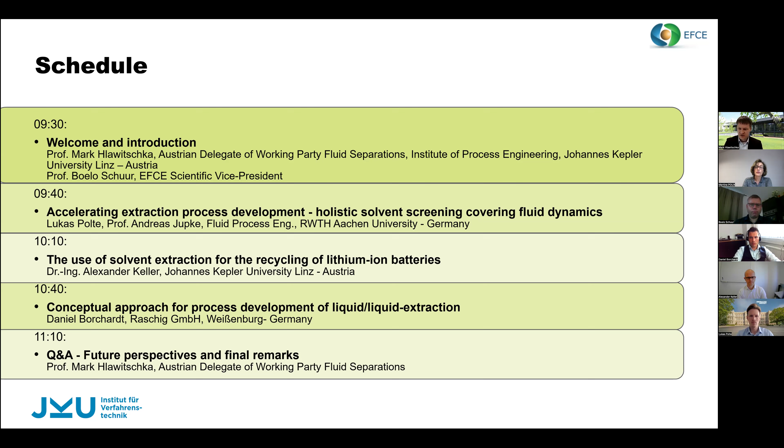About solvent extraction, from my point of view, it's becoming more and more important again because it's one of the drivers towards climate change, but also due to the global political shifts that we see. Liquid extraction or solvent extraction is one of the core technologies for efficient purification, resource recovery, and recycling. One of the main issues we face here in Europe is critical materials recovery, where we see lithium, cobalt, and nickel from spent batteries, for example. But even with green energy, we need rare earth elements for wind turbines and electric vehicles, and we see a broad application of solvent extraction towards pharmaceutical, hydrometallurgy, petrochemical refining, and wastewater treatment as well.

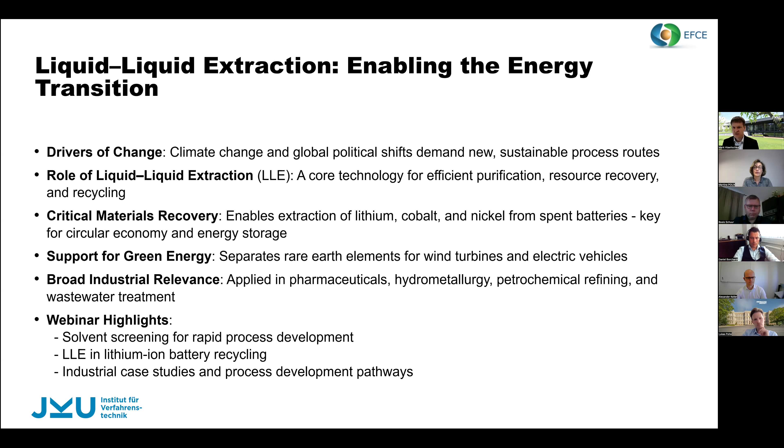So let's start with the webinar with the first talk about solvent screening for rapid process development from RWTH Aachen by Lukas Polte.

I just need to close mine. Oh, sorry. Now you should be able to open yours. Now it should work and you should see my screen, right? Yes, perfect, so the stage is yours.

Thank you very much, Mark, for the kind introduction and the words. I'm very happy to be here and to give some insights on our experiences on process design and process development for extraction processes. I fully agree on the points you said and just want to underline them.

In the process developments we did in research projects over recent years for so-called next generation or sustainable processes, we usually face a unique challenge. If you think about fermentation broths, metal recycling, enzymatic conversion, but also other recycling technologies like hydrolysis, you often end up with an aqueous phase where our target products are very highly diluted. If you want to use the classical petrochemical version of downstream processes, so rectification, this is not very sensible for those kinds of product mixtures.

In the research projects we worked on, extraction, liquid extraction, is often a very energy efficient alternative to tackle those challenges. Solvent screening is an essential part of process development for extraction processes because the solvent screening and selection happens in a very early phase of process development, but determines the process performance at the very end of the process development.

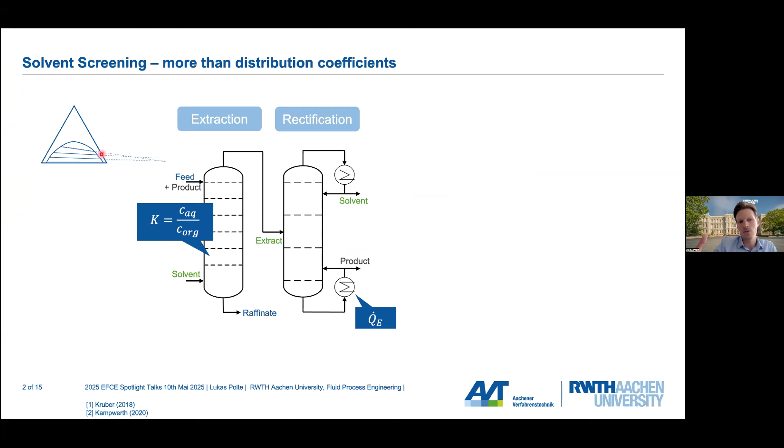If you look at the literature, there is a bunch of different approaches for this solvent selection. The easiest one simply relies on distribution coefficients or heat of evaporation for the rectification part, so simple performance indicators. You can go for more sophisticated models like pinch-based models, which depict the thermodynamic limitations very well and give a broad picture of the thermodynamic feasibilities of separations. But those approaches have one thing in common: they're sequential.

In the phase of solvent selection, you do just this thermodynamic picture of it, and the equipment design happens in a much later phase of process development. Even if you go for flow sheet simulations using equilibrium stage models in the solvent selection phase, you will use constant HETS values, height equivalent to a theoretical stage, which is perfectly fine for rectification, but not good for the extraction part.

Because we know in extraction, fluid dynamic and dynamic effects overall matter. We see, and we know from literature, that the HETS value may vary by a factor of 5, 6, or even higher. Which means if you use a constant HETS value at this stage of process development, you will end up with inaccurately estimated column dimensions.

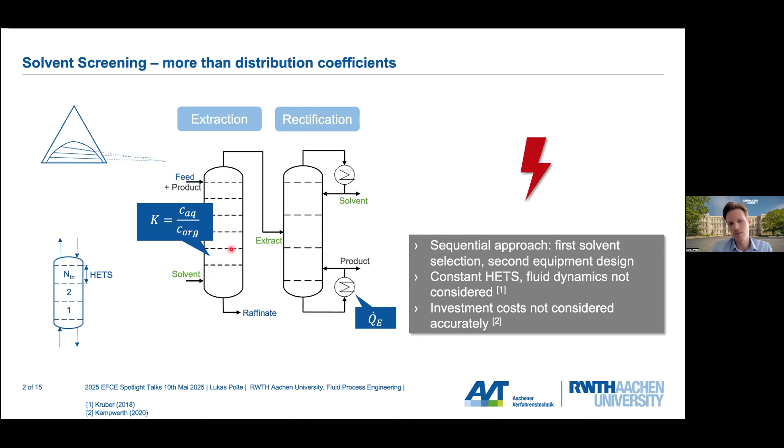So the height will be wrong or not accurate, which also means you cannot accurately estimate investment costs at this point of process development. This is why we set up a holistic model-based solvent screening tool covering the whole process.

Therefore, we need as input our separation task: the feed in volume and composition, the recovery we want for our target product, and the product purity we want after the rectification. Additionally, we need some property data, like pure component densities or viscosities, interfacial tension, and information about the thermodynamics and binary interactions to predict the LLE and VLE for both separations.

Knowing this input, we can then move to our process model, and the first thing in the extraction model is the submodel for fluid dynamics, solving fluid dynamics within the extraction counterflow current column. We cover here a few phenomena.

The first one is that extraction involves a dispersion in the extraction column, but there's not only one drop—this is a droplet size distribution represented by a Sauter mean diameter. We have a submodel predicting the Sauter mean diameter based on physical properties, operating conditions, and the geometry of the column, trained on Sauter mean diameters. The effects of coalescence and breakage are lumped into this Sauter mean diameter.

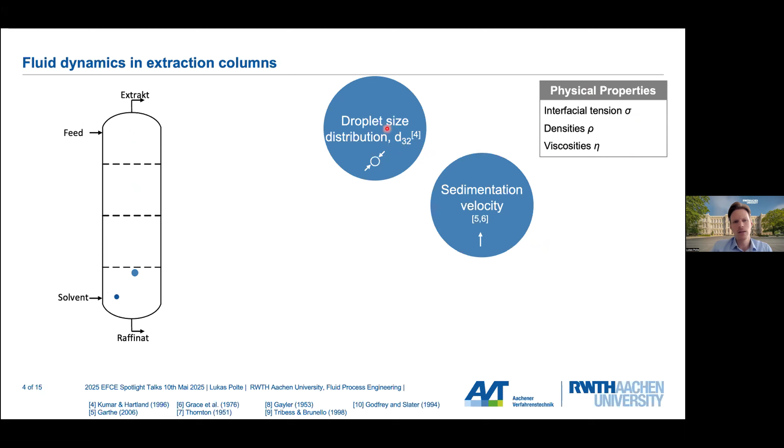Knowing the droplet size distribution, we can then calculate our sedimentation velocity. Since there's not only a few drops but many of them, we have a certain interaction of the drops, so we need to account for swarm effects, which gives us the final rising velocity of the droplets.

Knowing the final sedimentation velocity, we can then calculate the hold-up, which is just the ratio of dispersed phase to continuous phase within our extraction column. By knowing the hold-up and the rising velocity, we know the interfacial area available for mass transfer between the two phases, and also the residence time of both phases.

Those phenomena, from a fluid dynamic point of view, also define our flooding capacity, which is the upper operation boundary for our extraction column. All these phenomena are highly interlinked, but they also depend on the column type and geometry, which is why we implemented this model for three different column types: the pulsed tray, the rotating disc, and the Kuhni extraction column, which can all be depicted by this model.

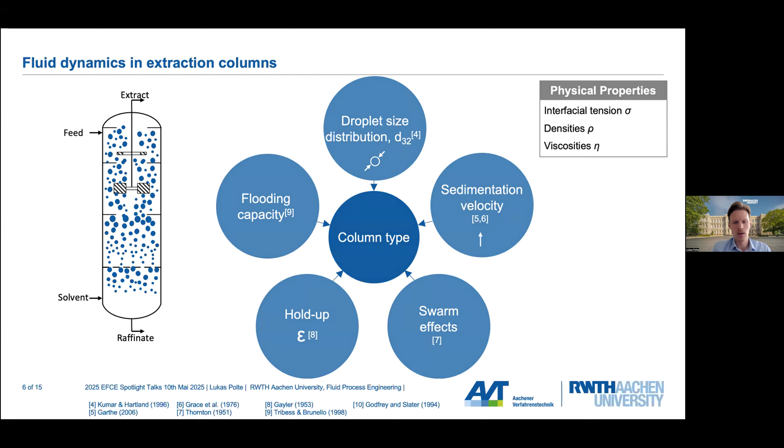Knowing now our residence time and the interfacial area for mass transfer, we can move to the mass transfer model, which is the core model of this extraction column model. Here we rely on a rate-based model, simply a differential equation along the height of the column.

The easiest form is just looking at the concentration of the product along the column height, so we have just one single differential equation. Then we defined our feed in composition, so we know the concentration at the top of the column.

And also we defined our recovery, which then gives us the raffinate concentration. Knowing those two boundaries gives us integration boundaries, which we can use to determine the height we need—the column height we need to fulfill this separation task.

In the next development steps of this overall holistic tool, we then implemented more ways to predict also other components, not only the product, but also to account for water and solvent, so the cross-solubility, and as many solutes as you want to look at, to have a multi-component mass transfer model within the extraction to predict where other products and also the solvent and the feed will end up in the extract and in the raffinate.

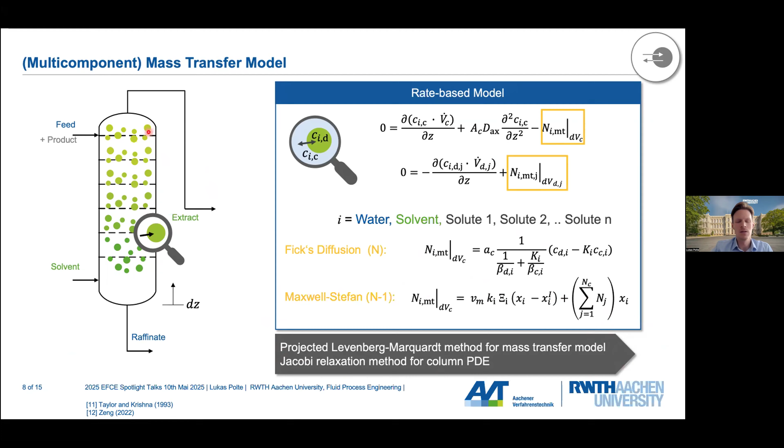Solving the differential equation for a product defines our column height, as I just said. The fluid dynamics and defining the flooding capacity gives us the column diameter. With those two, we did a full design of the extraction column.

We also know from the extraction model the composition and volume flow of the extract, which is then treated in the rectification column. The rectification model is kept simple because this is not the focus of our research, so we applied shortcut models, Fenske-Underwood-Gilliland, most of you will know it, complemented by some semi-empirical correlations.

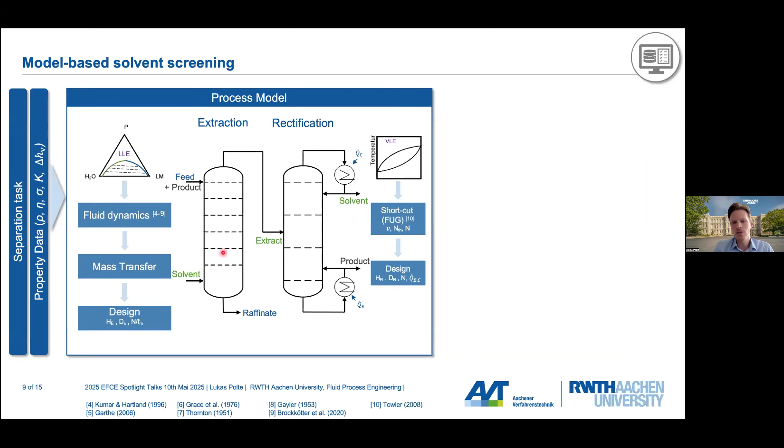This allows us a full design, giving the dimensions of the rectification column and also the energy demand. With the fully designed extraction and rectification columns, we can then move to our cost calculation. The total cost accounts for investment cost of both columns based on the dimensions, and also the operating cost based on the energy demand.

As I said, the feed flow is fixed, given by the separation task, and we can then vary the solvent flow as an operating condition. By doing this variation, we can find our optimal operating point, the optimal feed to solvent volume flow ratio with the lowest total cost.

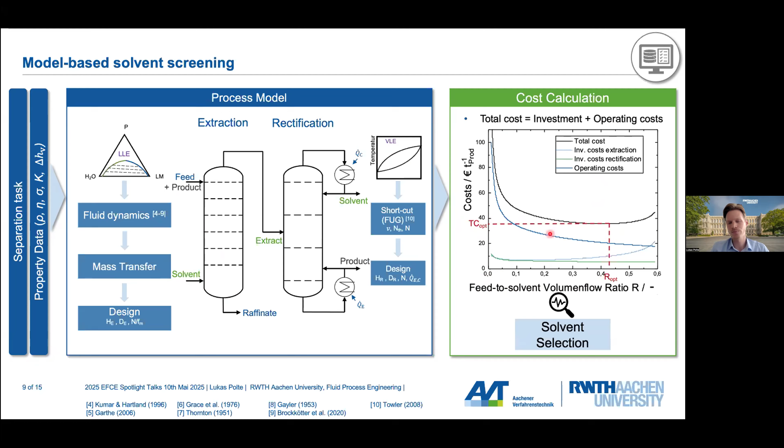We can run this model and this approach for as many solvents as we want, and compare them by comparing the minimum total cost. By that, you get a solvent ranking.

I want to show you some results for the case study of extracting acetone at 5.5% from water. On the left bottom side, for a certain solvent, which is adiponitrile, we can see some typical things when looking at the cost categories.

At the left side, for very low feed to solvent ratios—again, feed flow is fixed—that means at this side we have very, very high solvent flows, and the operating costs dominate. This is clear just due to the fact that we have a very high volume flow in extract, which needs to be evaporated within the rectification column, so there is a very high operating cost.

You can also see that the investment costs at this point are slightly increasing, due to the fact that the columns get very large in diameter. If we move to higher feed to solvent ratios, we see that the investment cost for the extraction begins to dominate. The extraction column gets very, very large, very high, because here we are approaching the thermodynamical pinch, the minimum solvent flow we can use to achieve the given separation task.

If we look at some full screening results, here you see the results for, I think, the 20 best candidates from a screening of over 150 solvent candidates. You see the cost categories given for operating costs and investment costs. What you can see from this is that none of the cost categories itself is decisive, but you need to account for both to really get the full picture of the performance of each solvent.

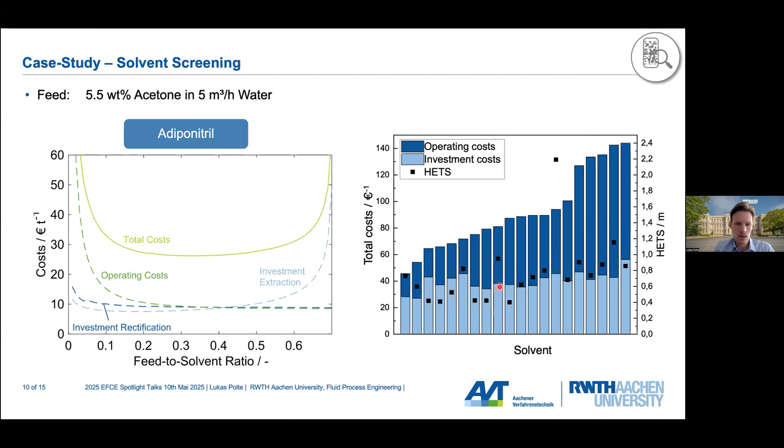To give a quick summary at this point, we can say we set up a full predictive model, so we don't need to do any experiments. We only need some input parameters, which are our separation task and property data. For the data, we are linked to two data banks—we use the Dortmund data bank for pure component data.

We have two links, to COSMO-RS and also to SMILES properties, which is an NN-based prediction of binary interactions from colleagues at ETH Zurich, to predict our NRTL parameters for our thermodynamic behavior.

We did see that by applying this process model, this holistic approach, we get a really full picture of the process performance we will end up with for both solvents, and have a really comprehensive solvent screening and ranking.

One thing I also want to mention is that this process model, or the ranking you did see, is not only a ranking—there's another piece of information inside, because the function is also kind of a filter. If you think of solvents which might have very good thermodynamic properties, so very high distribution coefficients or low heats of evaporation, they are also tested.

They are tested to see if they are feasible to be operated in an extraction column. So in this final ranking, they will not show up if they are just not operable, from a fluid dynamic point of view.

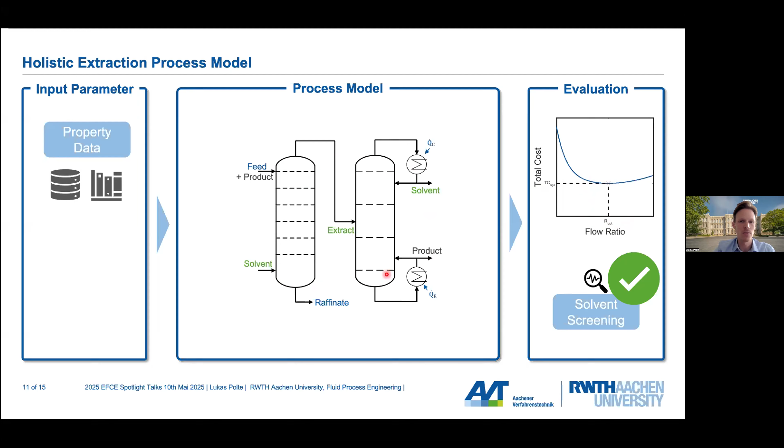And so with that, we could say we're done, right? Luckily not, because I always showed this process in the middle. For sure, this is a simplification of process development and also of downstream processes for those tasks I talked about. The first question we always talk about, beyond the obvious, is cross-solubilities.

Every solvent has a certain cross-solubility with water, and for the solvent we can easily recover the saturated solvent, which can be used in the extraction column, but we will end up with a solvent loss in the raffinate. So to really account for that, we need to apply another rectification column to recover our solvent. In most cases, this will be an azeotropic rectification to really get our solvent back.

But in the real world, it's just the simplest cases where you only have one product. Mostly you will end up with byproducts and catalysts. So if you think of fermentation, you will have byproducts or substrates, and you want to know where they will end up and how to recover them. With every additional component we're looking at, the downstream process will get more complicated. You will get another additional unit, and with every additional unit, the design space for this process concept increases or grows exponentially.

From my point of view, for those more complicated separation tasks, the only answer to solvent screening is superstructure optimization. If you look at, say, three columns, and look at more components, this will be four or five columns, and the extraction column is just one of those four or five columns. I already told you that really depicting multi-component mass transfer with a rate-based model is very complicated numerically and will not be feasible to be used in a superstructure optimization or flow sheeting approach.

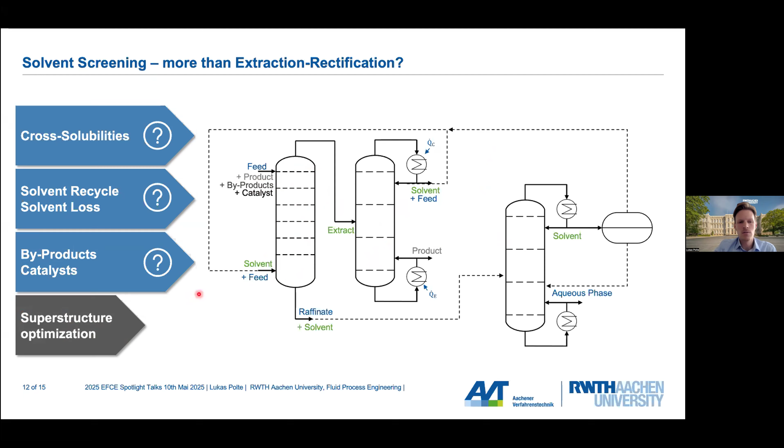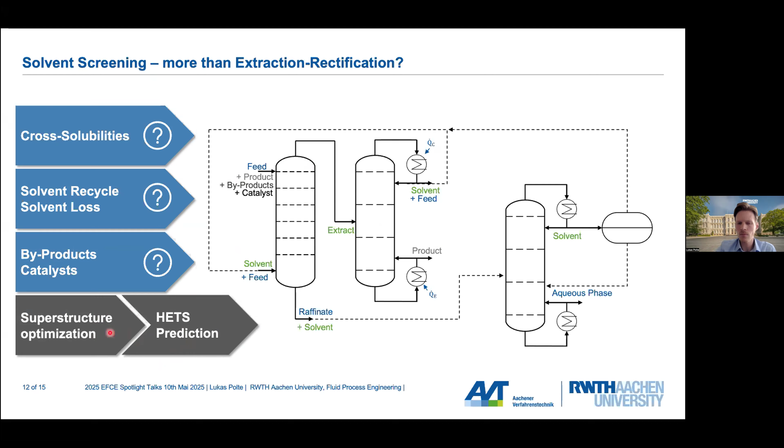This is why our idea was, for those separation tasks, to use our model, which depicts all phenomena in fluid dynamics and in kinetics, and to use a surrogate model for HETS prediction, which then can be coupled with superstructure optimization. And just as a quick idea of how that works...

I hope you can still see everything, how the surrogate model works.

So we use our rate-based model, the sophisticated model, to generate a database. In the first step, we set up a sample, which consists of the property data and the separation task, and this together builds a feature set. With this feature set, we use our rate-based model to predict the column height divided by the number of theoretical stages.

By that, we get a feature set, we get the HETS value, and also whether this data point is valid. In cases where the operation in an extraction column is not feasible, this will end up as an invalid data point. We can then use this database to train two models. The first one is a classifier, which just says, based on an input set of property data and separation task, whether this is feasible in an extraction column or not. The second one is a regressor, which then, in case of a valid data point, tells us the actual HETS value for this input set.

To set up this classifier and regressor, we use the knowledge discovery in databases process, which we already used to build up some submodels for our sophisticated rate-based model. For predicting Sauter mean diameters and also sedimentation velocities, we use this machine learning approach, and it's very good for those kinds of tasks.

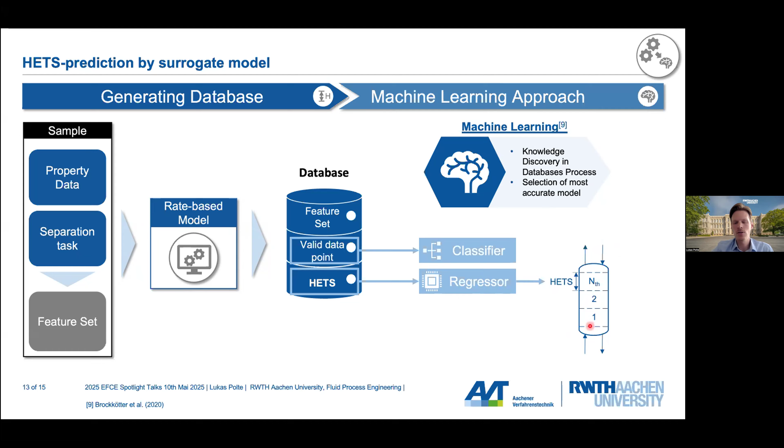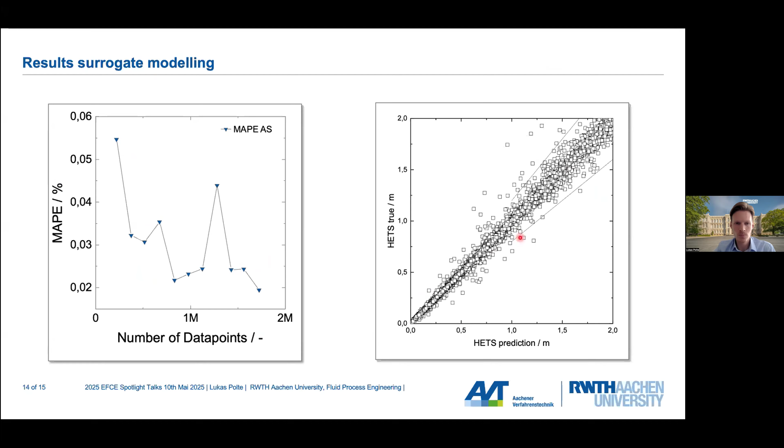And if you think of the uncertainty we have in the original model, this is, I think, a pretty good accuracy within this prediction. With that, I come to my summary and outlook.

So the first thing we did see is that fluid dynamic and kinetic effects matter in extraction processes, and they do influence the solvent performance and thus the solvent screening.

I want to emphasize that does not mean that we should take the best candidate from the solvent screening. It just gives an idea. So the first 10 solvents from the ranking, we know if we use them for further evaluation, going to the experiments afterwards, which are very time and cost intensive, they will not end up with a bad performance. For all of those solvents in the ranking, let's say in the first 20 candidates, they will always end up at a good performance at the end of the process development.

Then we implemented two different multi-component mass transfer models. I didn't show that, but they both have a very high accuracy, even if they are fully predictive.

And we used this sophisticated model to build up a database and a surrogate model for fast and robust prediction of HETS values. So let's say this is the outcome of our work, to be honest, because this also will be published and everyone can use it.

And just as simple, you need only your property data, your geometry, and then you can predict HETS values, which is very good, I think.

And this model, the surrogate model, we now will use for an application to a solvent screening case study, and just as shared for the holistic approach.

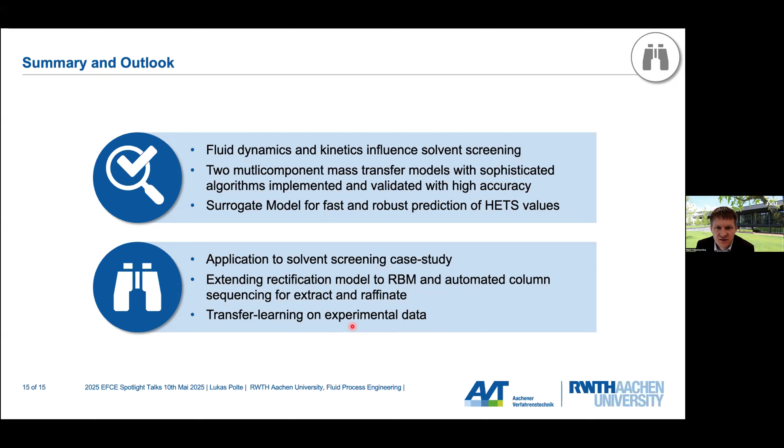We got an online question here. Dear Lukas, thank you for your interesting talk. I usually use the Kremser equation for estimating number of stages for an extraction column. Did you compare your model results with the Kremser equation? How close or different are the results?

Yes. So the Kremser equation is used to estimate the theoretical number of stages, right? And our model does not calculate the number of theoretical stages because we have this rate-based approach. But we use different equations, so stage model, equilibrium stage model, Kremser equation, and also a graphical method to evaluate the number of theoretical stages in post-processing. So our model just gives us the column height, and to get an HETS value, we need to divide this column height by the number of stages.

And therefore we also use, for example, the Kremser equation. If you're in the range of low concentrations for your product, what I did see is that the graphical method and also the full equilibrium stage model are very close to the Kremser equation when you have low cross solubility. In case you get to high cross solubilities, this may deviate by, I won't say like 20%, but that would be my first guess. Yeah, okay, thanks a lot.

So if you have your tool, did you try it even in an industrial case, or did you have your own experiments from your laboratory, for example? Did you have the chance to build an extraction column, a distillation column, and compare it there directly? That data would be very, very nice.

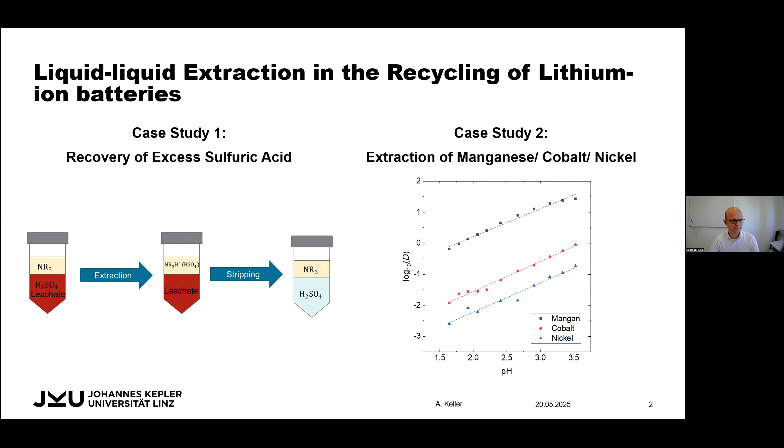So that's the classic approach in the recycling process. Maybe you're not too familiar with the recycling process of lithium-ion batteries, so I want to show this to you. If we have the spent lithium-ion batteries, they come from a wide range of different applications. Consumer electronics, electric vehicles, and energy storage are the 3 major sources of the spent batteries.

And if we go to a hydrometallurgical process, then we typically start with a discharging of the batteries to avoid short circuits, minimize fires, and enable mechanical processing.

And as they are discharged, we continue with the mechanical treatment, so shredding, classifying, and sorting. And here we already start with the recovery of different fractions.

And what's of interest in our case is the so-called black mass. It's the active material of the lithium-ion batteries. So here are the value materials: lithium, cobalt, and nickel.

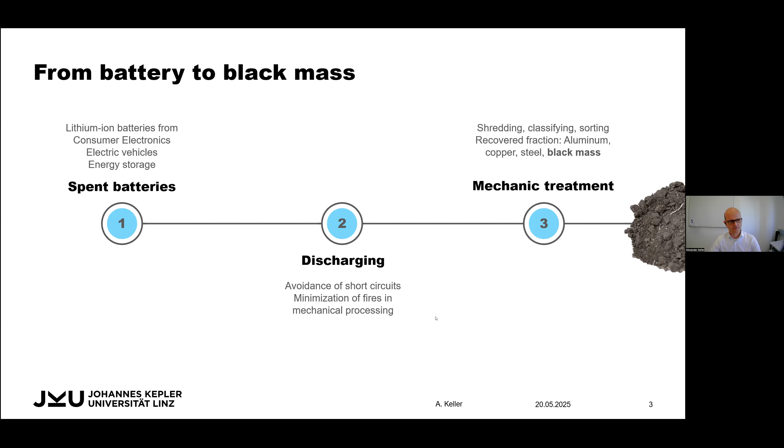And to get them separated, we continue with the hydrometallurgical treatment. So first of all, with the leaching, here we dissolve the metal oxides in acid, and then we continue with the purification. So typically we find there side elements like aluminium, iron, copper in a small quantity, which is not suitable anymore for recovery. And in the last step, we continue with the raw material extraction. So as you see here on the slide, the leaching is proceeded

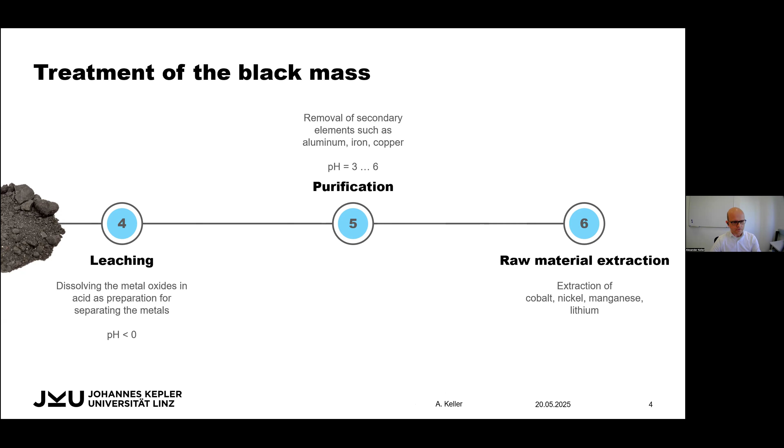at a high acid concentration, typically with a pH value smaller than 0, typically -1 or something like that. And the purification is typically carried out at a pH value of 3 to 6. So you see we have there a huge pH shift, and this will be an issue I want to show you in the next slides.

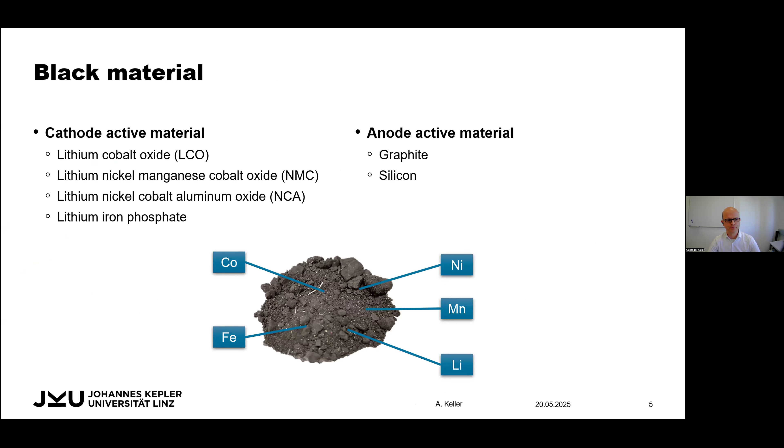So again, here the black material, the cathode active material. Here we have the different elements: lithium, cobalt, manganese. And from the anode side, there we have also graphite and silicon, which could also affect the extraction in the downstream process. So case study 1 is the recovery of excess sulfuric acid.

So typically, if you want to purify the leachate, you do this by precipitation. So we start with the leachate solution where lithium, cobalt, iron, nickel, aluminium, and manganese are present, and we want to get rid of typically aluminium and iron. And we do this by precipitation of the hydroxides, typically in the range of pH 3 to 6. And to do so, we have to get rid of the excess sulfuric acid.

So this is typically very chemically intensive. We need lots of chemicals. Typically, for 1 kilogram of sulfuric acid, we need about half a kilo of caustic soda and the same range of calcium carbonate. So here we have a high chemical requirement on one hand, and the second issue is that we also produce a lot of waste.

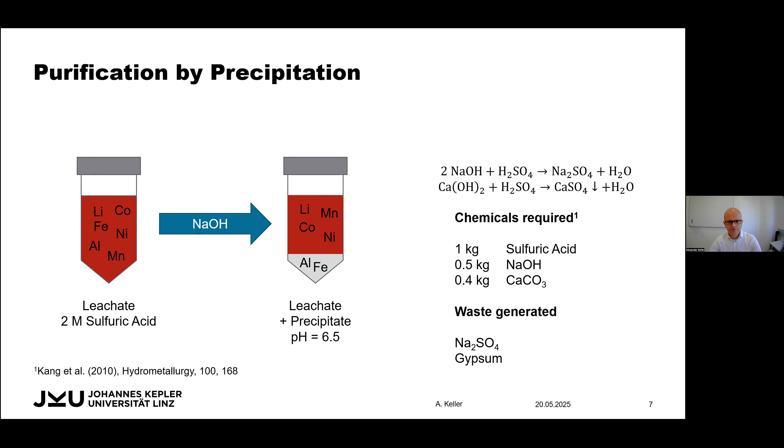And here we got an idea: maybe we can use solvent extraction to minimize the chemical requirement. The idea was maybe we can use an anion exchanger so that we can extract the sulfate to the organic phase, so that the leachate becomes acid-free, as the amine will emit hydroxide ions. Then we can take the organic phase, strip it, and recover the sulfuric acid. The organic phase we can reuse for new leachate, and then we have no production of waste in terms of sodium sulfate.

And yeah, you can also use the sulfuric acid in the further process, maybe for the leaching process again, or maybe for the stripping in the extraction later on.

Yeah, we did some experiments with trioctyl amine, which we dissolved in Shellsol D70, and used a phase modifier here, because trioctyl amine tends to build up a third phase, and to avoid this, we use this phase modifier. But we saw with the investigated phase modifier, we have no influence on the extraction yields, which was very beneficial.

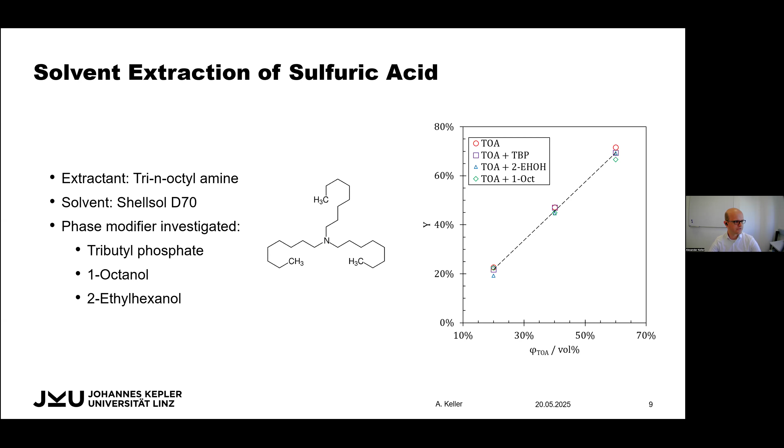Yeah, we carried out some experiments and we could achieve extraction of the sulfuric acid of already 98%. And what is also of interest is after the stripping, the obtained sulfuric acid, shown on the right-hand graph under stripping, we are also interested in the purity of the obtained sulfuric acid. And then we saw that we have low concentrations of aluminium and cobalt in this stripping solution.

And this is also right now a point where we do some research to minimize the co-extraction of the metals, so that we can use this for the stripping in the extraction process.

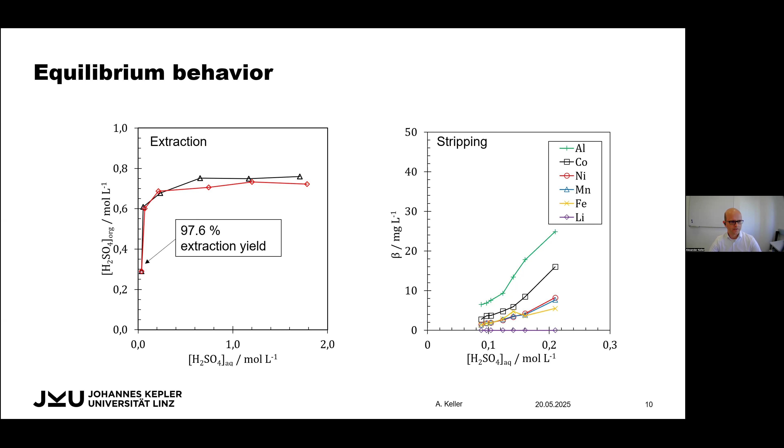So an idea where we can apply the acid recovery in the overall process is depicted here. So between the leaching process and the purification process, we can apply the acid recovery.

And the recovered sulfuric acid, we can either use for the leaching process, where we have the requirement of a high concentration of sulfuric acid, but the purity is not too important. Or we have maybe a lower concentration of the sulfuric acid, but a higher purity. In this case, we can use this recovered sulfuric acid for the stripping process in the solvent extraction process later on.

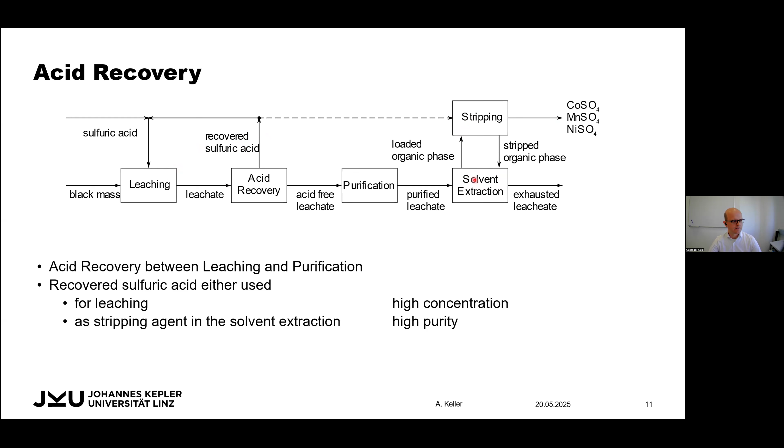The second case study I want to show you is the extraction of manganese, cobalt, and nickel - a typical hydrometallurgical approach to separate these metals from spent lithium-ion batteries. There, typically, we start with the choice of the right extractant.

The two most dominant extractants are D2EHPA, which is a phosphoric acid ester, and we see that this extractant prefers to extract manganese over cobalt and nickel. So this is a good choice for the extraction of manganese, but in the second case, we could also try to extract cobalt or separate cobalt from nickel. However, as we see from the isotherms, this is a pretty hard job to do.

On the other hand, there is Cyanex 272, which was developed for the separation of cobalt and nickel. We see that this is a really good extractant for this separation, but the separation of manganese and cobalt is not too good. So for our process, we have to first extract the manganese, then secondly the cobalt, and the third step is the nickel product.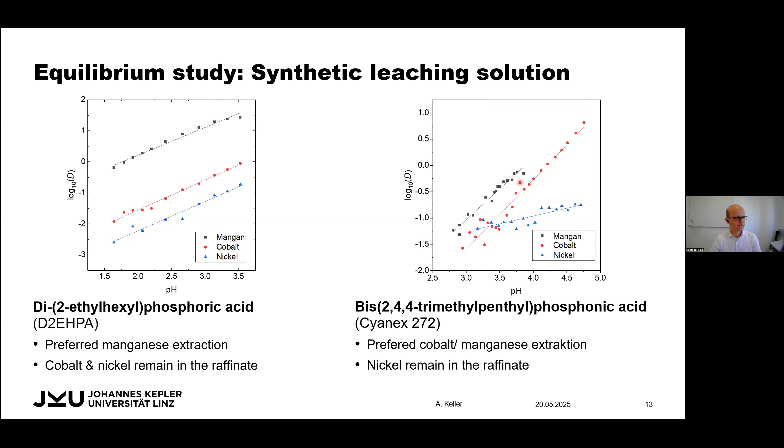Right now we had a look at the equilibrium aspects, and for the continuous extraction, maybe in an extraction column, it's also of interest how we can manage the pH value during the process.

One possibility is to add sodium hydroxide directly to the feed, but this has a major drawback as cobalt can precipitate as a hydroxide, and then we have trouble dissolving it again. So a better way is to neutralize the D2EHPA in the first place, and then we don't have the pH shift during the extraction anymore.

Now the question arises, how much should the D2EHPA be neutralized? This depends on the neutralization degree, which affects the equilibrium pH. So we are able to shift the pH value.

Typically during the extraction, the pH will shift to the acidic range, but with higher neutralization degrees, we can compensate for this pH shift. In the best case, we do not change the pH value during the extraction, but if our feed is too acidic, we are also able to shift the pH value higher, which is beneficial for the extraction.

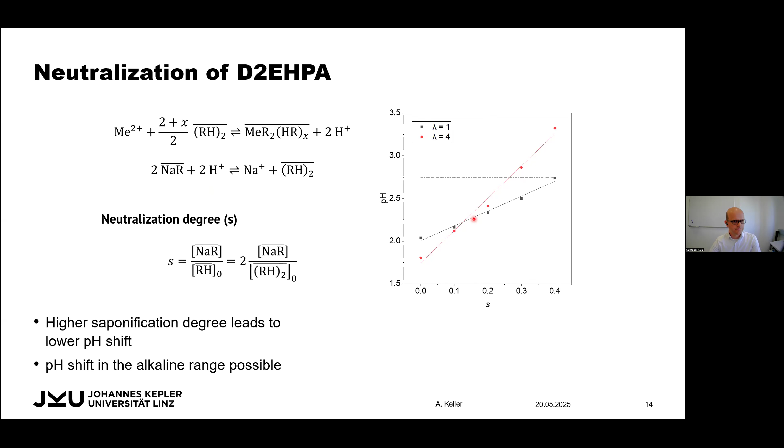We took this for further investigation for the continuous extraction, and we investigated the extraction on a pulsed disk and donut column, which is depicted here. First of all, we did experiments for the separation of manganese and cobalt, only focusing on the operation parameters, which are the phase ratio, the loading of the column, and the pulsation intensity.

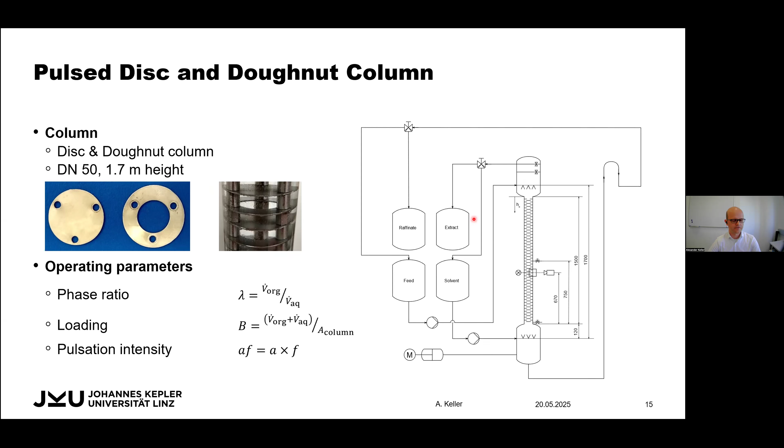The very first thing you do in this setup is focus on the hydrodynamics, and here I want to show you some insights about the hydrodynamics, especially the holdup. What we are interested in for the extraction process is small droplets, because we get a high interfacial area, but also typically a high residence time in the column, so we can achieve equilibrium conditions.

What you see here is that with the pulsation intensity, we can manipulate the droplet size itself and also then the holdup. We start from the very low pulsation intensity with the mixer-settler regime, go on to the dispersion regime where we already have small droplets, and continue to the emulsion regime, which is not too beneficial, as the droplets become very small and we are near the starting point again.

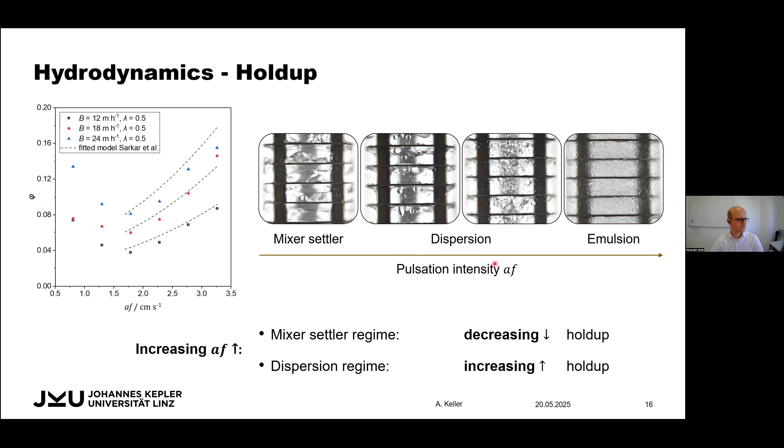So let's have a look at the extraction yield. What I want to show you here is a design of experiments where we looked at the pulsation intensity, column loading, and phase ratio. What we obtained first was that we saw no significant effect of the column loading in the range of 12 to 24 meters per hour, which is a typical operation mode.

We continued with that, and then we saw that all of these effects have a second order effect of the pulsation intensity as well as the phase ratio. With that, we could produce a nice model for the extraction yield as depicted here, and by manipulating these parameters, we could already obtain an extraction yield of more than 95%.

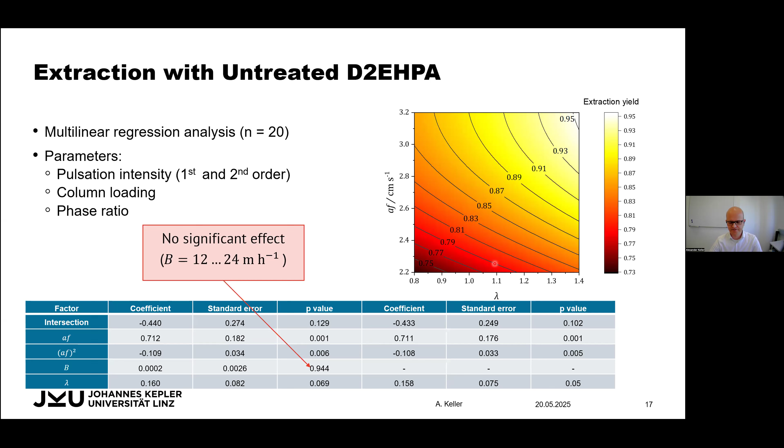To further enhance the extraction yield, we then had a look at the effect of neutralized D2EHPA. What I want to highlight here is if we have no neutralized D2EHPA, so the pure native D2EHPA, then you see in this graph on the left, this is the feed concentration. We see that the extraction yield, or the remaining manganese concentration, decreases with the column height, which we expect. But we see that this extraction yield is limited due to the pH value inside the column.

So with continuing extraction, the pH value becomes lower and lower, and hence the equilibrium will be shifted to the educt side. So we are limited in the extraction. To avoid this, we use this neutralized D2EHPA, and here with a higher neutralization degree, we see that this effect of the limited extraction due to the pH value becomes lower and lower with increasing neutralization, or sometimes also called saponification.

So maybe you would say, okay, I use the highest neutralization degree, but you also have to look at the side effects. I want to show you some findings in our research. With a higher neutralization degree, you see that the interfacial tension becomes very low, which means that at the bottom of our extraction column where the neutralized D2EHPA is present, we have a very low interfacial tension, which leads to an emulsion regime. Maybe we are then also close to the flooding point.

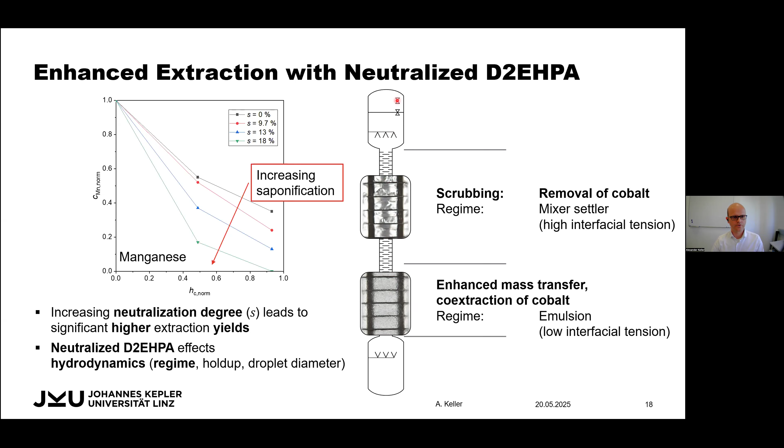With that, I want to come to my conclusion. What I wanted to show you is that there is a wide range of applications of solvent extraction within the recycling of lithium-ion batteries. On one hand, we have this traditional separation of value materials, manganese, cobalt, and nickel, but also we have new methods to recover excess sulfuric acid.

Typically we start with the equilibrium studies as a basis. On one hand, we choose the correct extractant, and also get an idea of the pH value required for the operation. Then in the continuous extraction, we want to simulate the industrial process and focus more also on the purity of our final product. With that, the end of my presentation. I want to thank you for your attention, and I'm open for questions.

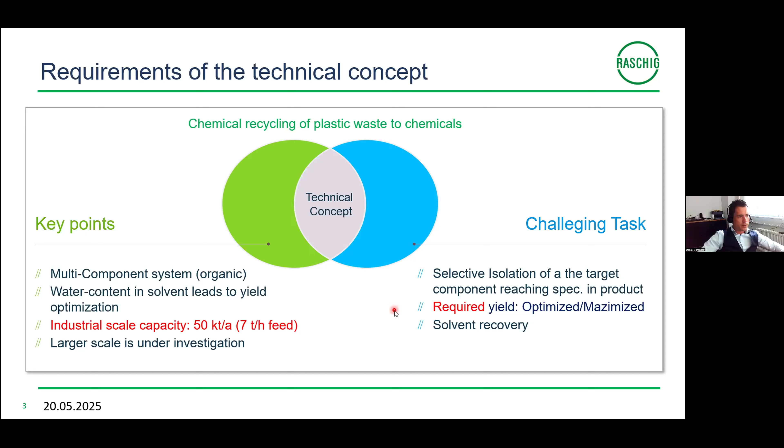About the requirement of the technical concept: it's a chemical recycling process of plastic waste to chemicals, matching the main focus of this webinar - technology in the transition towards sustainable energy. Some key points: it's a multi-component system and organic feed. During the first lab scale test, we found that water content in the solvent leads to yield optimization. We got an industrial scale from the customer with 50 kTA, so 7 tons per hour feed, and a larger scale is under investigation future-wise. Some challenging tasks I'd like to share: the selective isolation of a target component that I cannot specify here - it's under non-disclosure. Reaching a specification in the product and required yield that is optimized and maximized, and we also considered solvent recovery.

About the process, it's a Conti process of chemical recycling of plastic waste to chemicals. The first process step is the reactive pretreatment to remove impurities, subsequently entering into a pre-wash column to remove potential entrained unwanted components from the upstream process.

Furthermore, this washing step should increase the robustness of the overall process as we have different feedstocks or feedstock qualities to consider. Then we get to the core process, the selective extraction process or solvent extraction process to selectively isolate our target component, and afterwards using a scrubber or back extraction to remove the residual portion of the solvent.

entrained in the raffinate due to a high mutual solubility between the solvent and the feed phase. On the downstream side, we have a fractionated treatment of the extract produced during the solvent extraction, separating different organic components that we call byproducts, and the water flow contaminated with the solvent is then emitted from the last stage of the fractionation and supplied to the regeneration column to recover or recirculate the water and solvent to the different process steps: the pre-wash, the solvent extraction, and the back extraction.

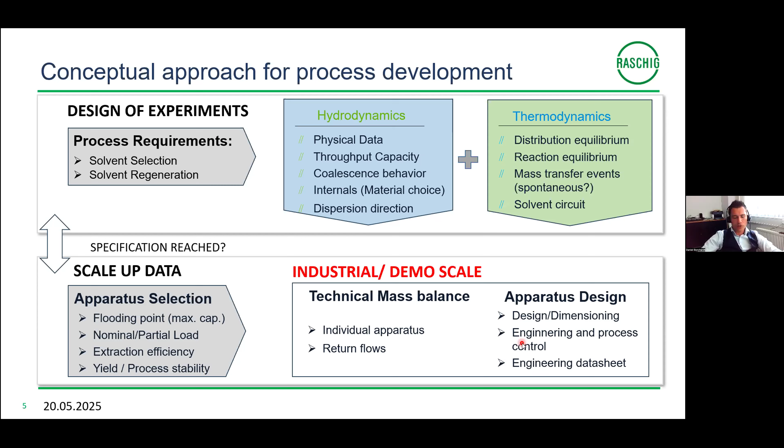I would like to dive into the solvent, or the core process, the solvent extraction process.

The selection of the solvent used for the extraction process was made using the infinite dilution activity coefficient and the associated selectivity for the individual transfer component, which I cannot share. As this is a multi-component system, we consider a cut, keeping a specific group of components in the extract at the bottom of the column for downstream fractionation, and the other components leaving at the top as raffinate, which are necessary to keep in the product. But the solvent was provided by the customer, so we knew what solvent to use for the process.

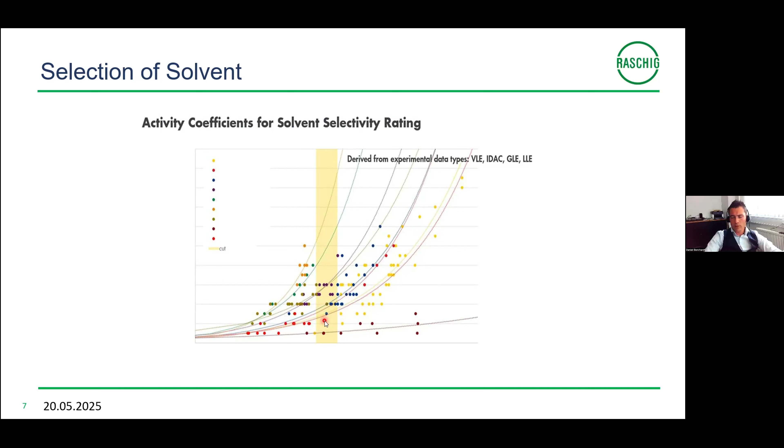A typical first investigation is the distribution equilibrium. We contact the feed material with fresh solvent, mix it, and transfer it into a separation funnel, using different analytical methods like GC-FID, GC-MS, and ICP-OES to investigate the concentration range in the extract and raffinate, to determine the distribution coefficient. We can then draw this into an equilibrium diagram as a curve, which gives an initial idea of the difficulty of separation. The flatter the curve, the higher the number of theoretical stages needed, and the higher the minimum solvent ratio to reach the specification or end concentration of the product.

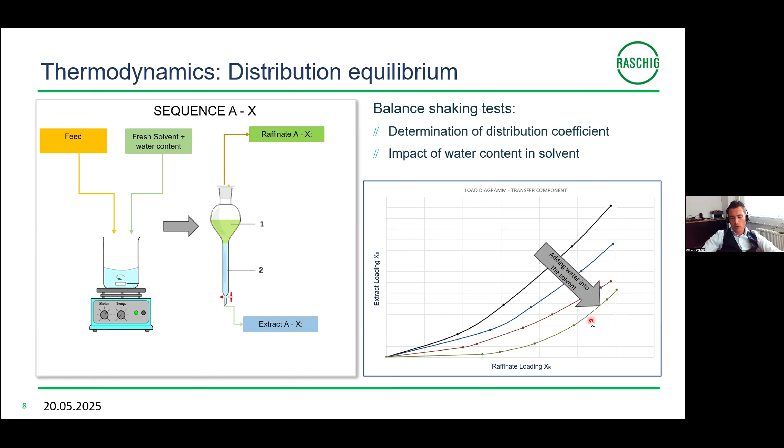In the end, in addition to the specification we have to reach for the transfer component in the product, one overarching goal is to keep the yield as high as possible. The loss of feed should be kept to a minimum, since the achievable product quantity relative to the feed quantity is a key factor for the economical efficiency of the overall process.

So we had to find a suitable working range. By adding more water to the solvent, a significant increase in yield can be observed. We want to minimize the risk that process fluctuations—for example, if you operate with slightly less water—could harm the overall process. On the other hand, with a pretty high amount of water, the curves approach an asymptotic threshold value, so there's no longer any relationship between the efficiency losses and the presumed gain in yield.

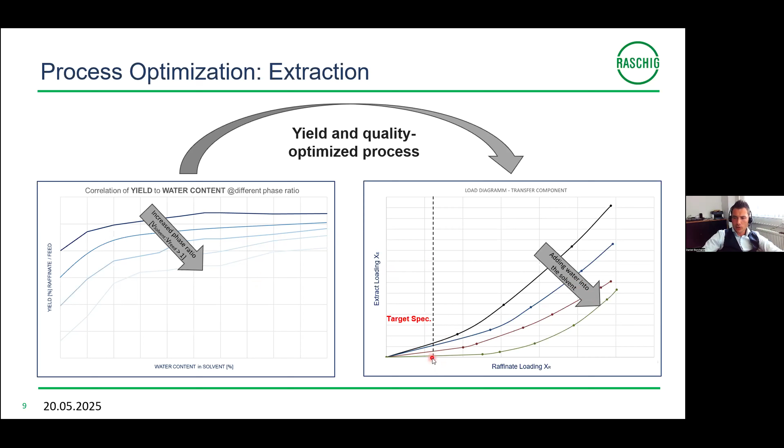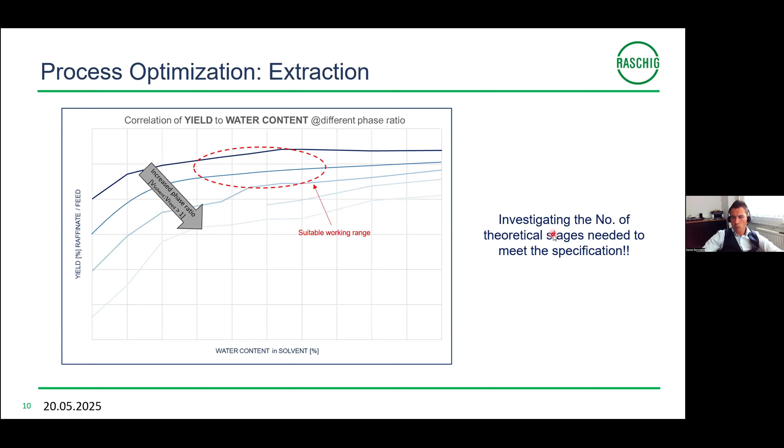But we had to investigate the number of theoretical stages needed to meet the specification. So we made a first assumption using an equal solvent-to-feed ratio of 1:1. We noticed that the specification could not be reached, with the feed concentration remaining more or less the same.

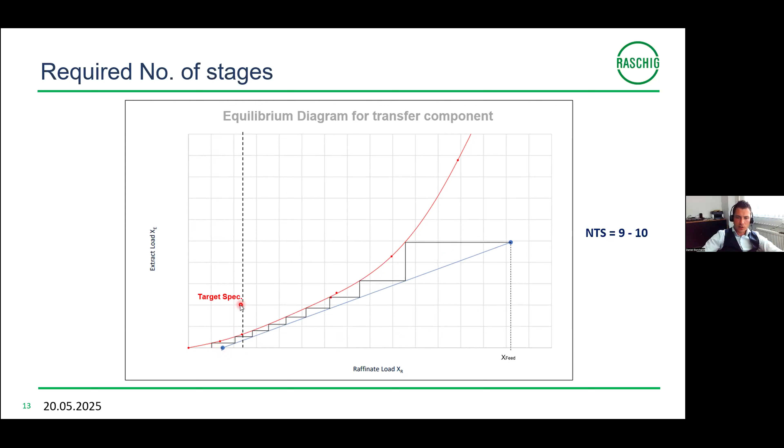Then, trying to reduce the working line to get a bit deeper into the low concentration range, we noticed we could reach the target specification, but we wanted to generate a bit more buffer for operating the columns more robustly. So we arrived at a number of theoretical stages of 8, then increased the phase ratio to see that there is enough space to the target specification with a number of stages between 9 and 10.

So we used this information, conducted with small lab-scale shaking tests, to determine that the number of stages is 9 to 10. We have a pretty moderate phase ratio, so we could generate sufficient hold-up in the column. There is a high quantity shift caused by mutual solubility, and the density difference for this extraction column was higher than 250 kilograms per cubic meter. Also, the low interfacial tension meant we did not need any pulsation, and the dynamic viscosity for selecting the right dispersion direction was in the range of water.

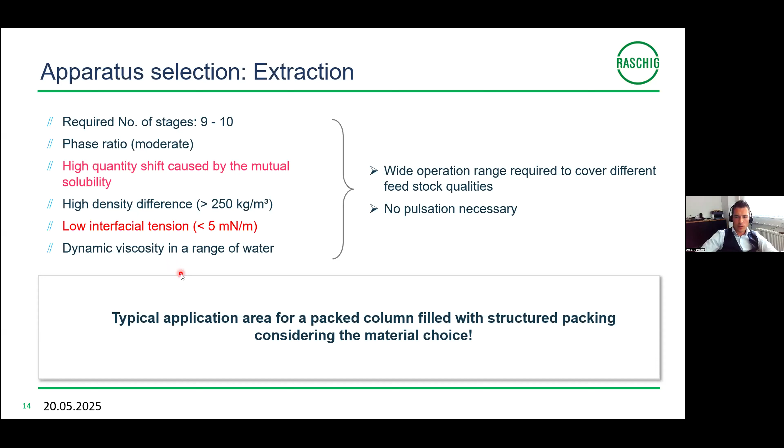Especially because we had to choose, or consider, a wide operation range required since we have different feedstock qualities—one is a bit more dirty, the other less dirty. We decided that the typical application for this area would be a packed column filled with structured packing, also considering material choice. I was preparing one slide on why this is so important.

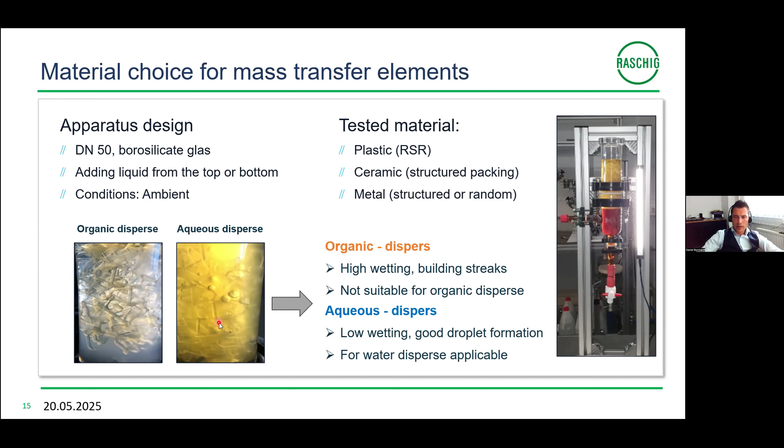So it's very important, before executing pilot trials, to investigate the wettability characteristics for the real substance system. After this was done, we built up a column filled with structured packing and also random packing.

That's the extraction column on the left-hand side, and the scrubber column on the right-hand side. It's a DN50 borosilicate glass column, jacketed, so we can keep the temperature constant over the entire column height. We built it with an effective height of 5 meters. We have exchangeable dispersed phase distributors for the top and bottom in case we change the dispersion direction.

We also take some samples—we have profile sample points over the entire column height so we can track the HETS, or what is necessary for scale-up to the industrial scale.

We have heat exchangers for all inlet flows. We consider some mechanical components, for example gear pumps—we're a fan of using gear pumps for executing the trials, as it gives a more pulsation-free feeding. We have an interface level probe located in the top or bottom decanter, depending on the dispersion direction.

That probe sends a radio signal to a transmitter, keeping a valve open or closed to keep the interface at the same level. We also consider a pulsation system, a PTFE bellows located in the bottom decanter, moving up and down—similar to what Alexander shared before—so we can set the amplitude and frequency within a range to get a smaller droplet size distribution.

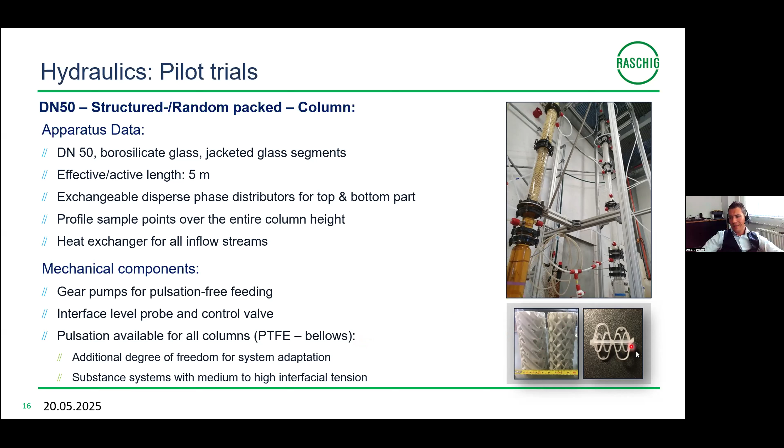That generates an additional degree of freedom for system adaptations, especially for substance systems with medium to high interfacial tension. That's the packing we use, for example a ceramic packing or a plastic ring, depending on the dispersion direction needed for the process.

That's the hydraulic behavior we investigated by operating the pilot trials. I cannot specify the capacity, but we could notice that the higher the volumetric ratio between solvent and feed—the higher the solvent ratio—the higher the capacity, as expected. Especially by using water at a specific amount, we could also increase the flooding point or maximum capacity. The orange line is the maximum load and the blue line is the nominal load.

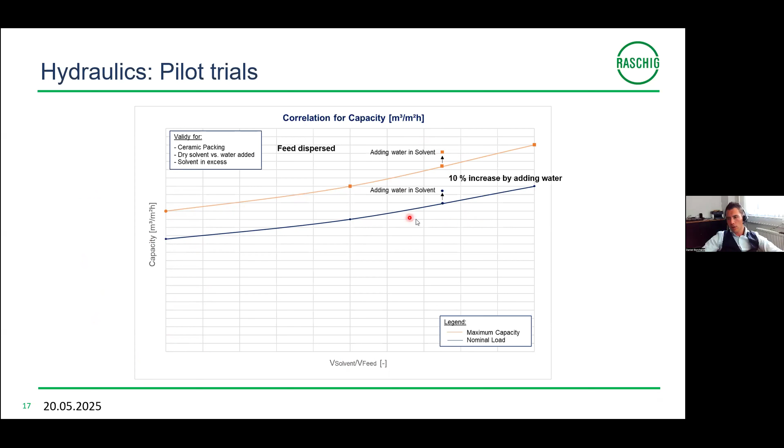We used this information from the pilot trials to form the basis for the scale-up. We normally need three points: the maximum capacity, the flooding point, and the nominal load capacity, because we normally set our design point between 70 to 80%. We also consider the top and bottom conditions, especially for technical systems with high mutual solubility.

And also the HETS values plus the scale-up factor, that is something already published, how to generate a scale-up factor. But we also have our company's internal empirical function to get from the pilot trials or scale-up trials to the final design for the commercial plant.

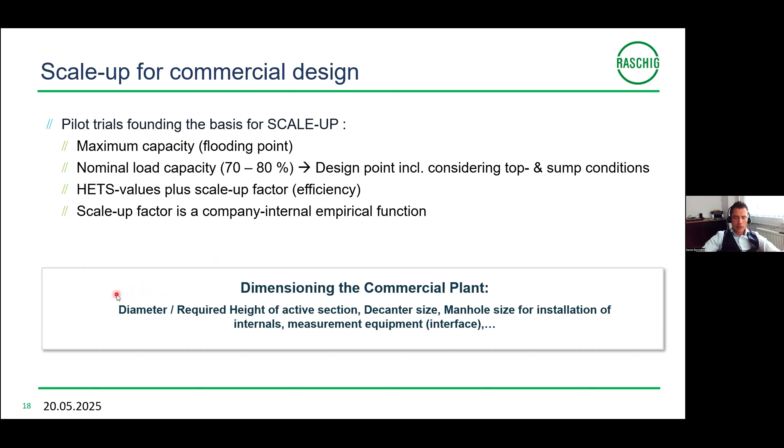So our customer is getting the diameter, the required height of the active section, also the decanter size and manhole size for the installation of internals, also the measurement equipment for the interface in the bottom or the top. And in the end, that's the outcome for this project.

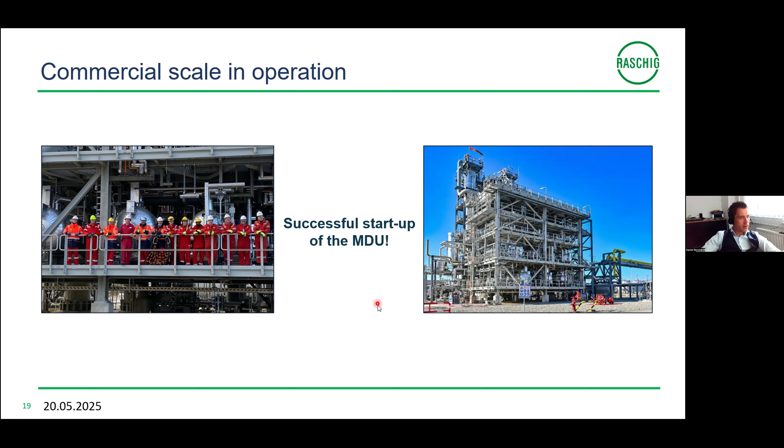We could successfully start up the MDU. So that's a picture of the overall process. I was just picking out the extraction process, but we were successfully in operation and on spec in the end. So last year in the third quarter, the column was built up, and we are happy that the overall system is working as it should be.

A short summary: there should always be an intense investigation of the thermodynamics and hydrodynamics relationship to reduce the amount of pilot trials. We normally need three scale-up parameters: the flooding point, the max capacity, the nominal load, also for partial load, if there's any influence for operating the plant not at 80%, and the HETS, including the scale-up factor, to get to the required height of the industrial scale. And in the end, the MDU, the industrial scale, was successfully in operation on spec.

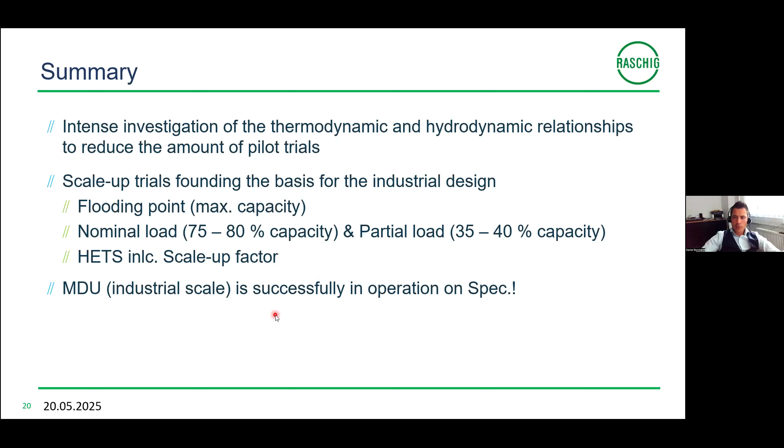So, many thanks for your attention.